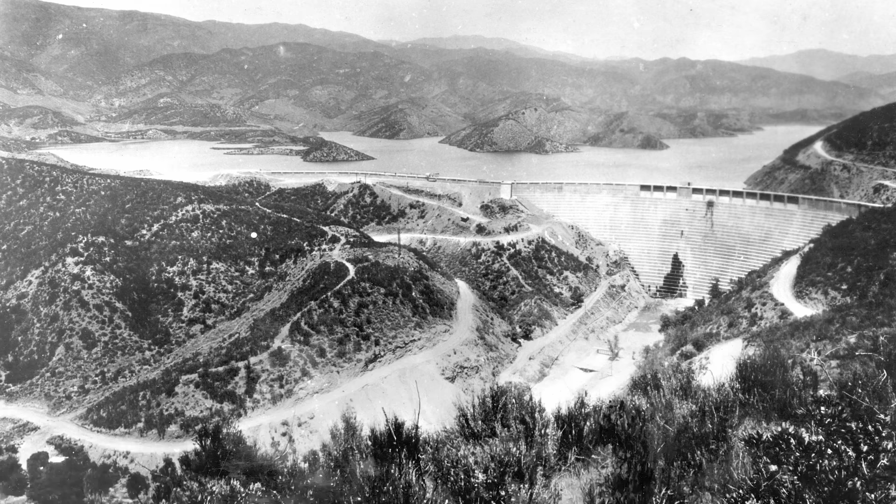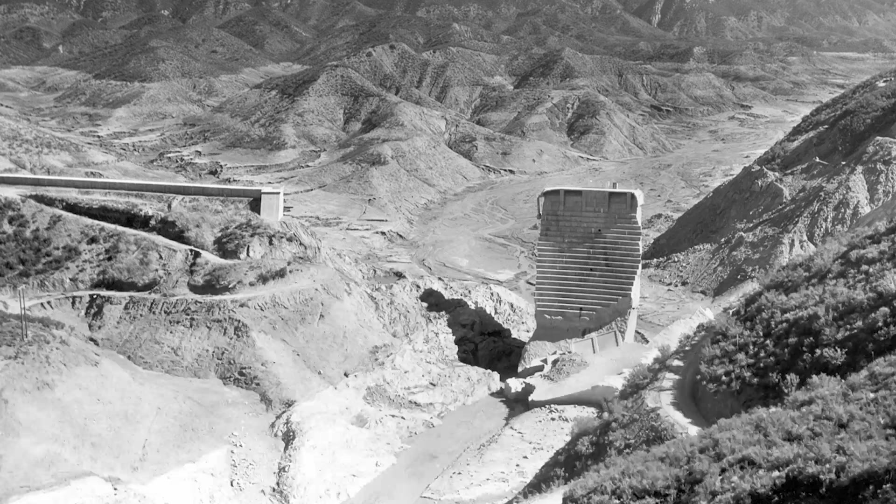The year was 1928, and Californians were still asleep in their beds when a towering concrete dam, once hailed as a triumph of modern engineering, crumbled, unleashing a wall of water that tore throughout the unsuspecting valley. Entire towns were swallowed whole, lives were lost in a heartbeat, and the landscape was forever scarred. Perhaps the most terrifying notion about the event was just how fast everything unfolded.

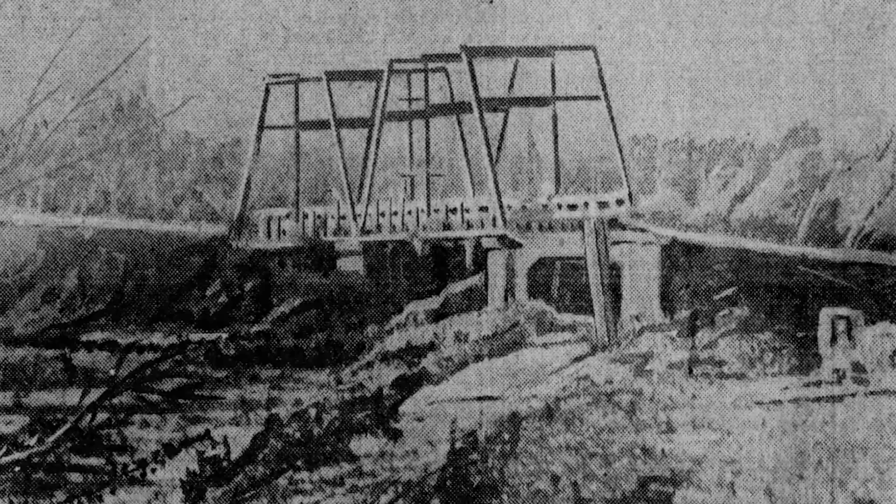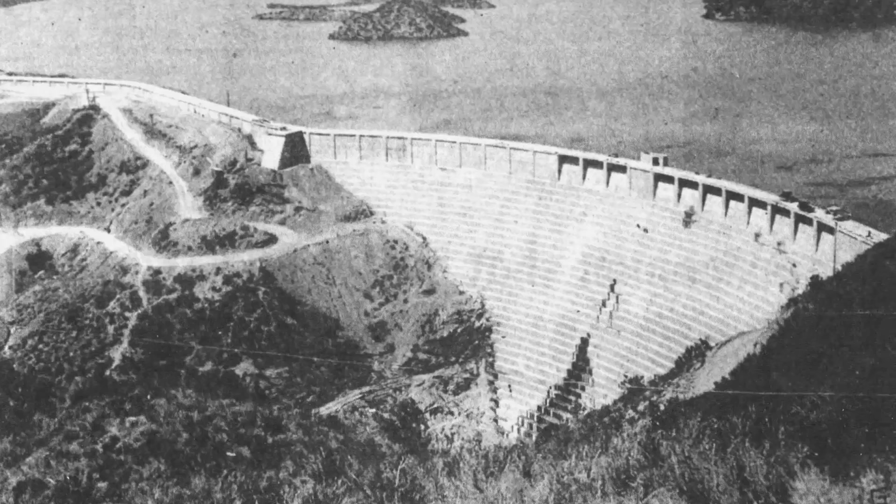The St. Francis Dam collapse remains one of the deadliest engineering failures in American history. But what caused this seemingly invincible dam to fail so catastrophically? Was it a design flaw, a construction error, or a deeper, more unsettling truth? The answer might shock you, so stay tuned to find out, as today we discover the history of the St. Francis Dam collapse.

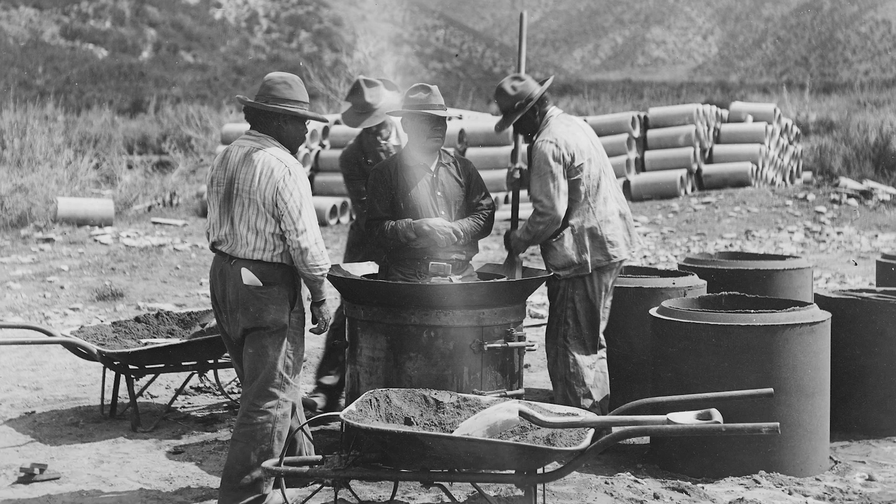The heart of this story is water, a simple necessity that, historically speaking, has always been problematic for California. For millennia, seasonal rains carved their way through the rugged Sierra Pelona Mountains, feeding a small creek that snaked its way towards the Pacific, where ultimately it would dump precious freshwater into the sea. In the area's early history, human life thrived on a natural balance, with scattered settlements drawing their water from this source. But by the early 20th century, a different kind of thirst had gripped California.

The once sleepy town of Los Angeles was transforming into a vibrant metropolis. Its population boomed, fueled by sunshine and the promise of a new life. However, this burgeoning city faced a critical challenge: water. You see, Southern California is naturally arid, and the existing water sources were strained to the limit.

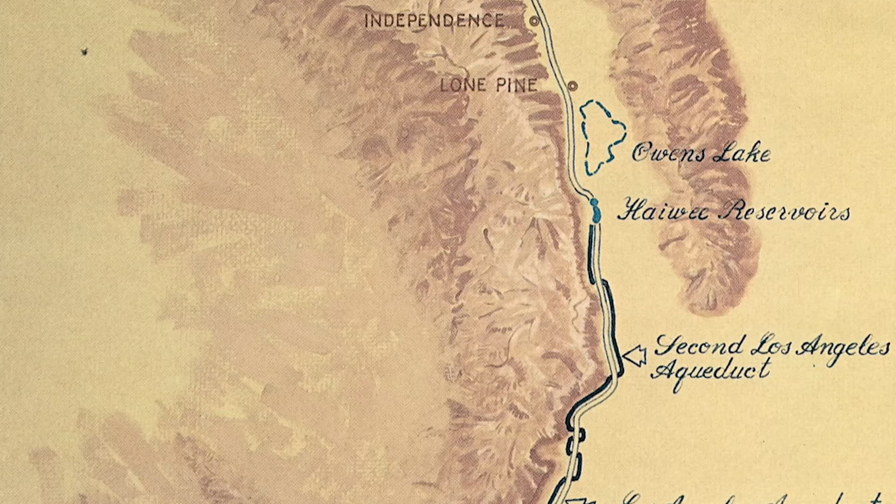Enter William Mulholland, a visionary engineer who embarked on a daring project, the Los Angeles Aqueduct. This colossal feat of engineering would siphon water from the Owens River hundreds of miles away to quench the growing thirst of Los Angeles. But the aqueduct wasn't enough. The city needed a way to regulate the flow of water and create a reserve in case of droughts or emergencies. This is where the story of the St. Francis Dam begins.

The race to quench LA's thirst left little room for deliberation in the design phase of the St. Francis Dam. So Chief Engineer William Mulholland, a self-made water baron known for his bold vision and breakneck pace, opted to adapt the blueprints of a previous dam, the Mulholland Dam. This expediency, however, cast a long shadow. You see, unlike the meticulously surveyed foundation of the Mulholland Dam, the St. Francis Dam site received a cursory examination.

The unforgiving terrain presented a complex geological puzzle. Steep, rocky slopes plunged into the narrow valley. And as if that wasn't bad enough, their composition was a hodgepodge of fractured rock and weak shale. While a thorough survey may have unearthed these underlying weaknesses, the pressure to deliver water quickly trumped any such precautions.

And so many attest that the choice of the location itself stemmed from a blend of practicality and Mulholland's characteristic audacity. The canyon offered a natural choke point where a relatively short dam could create a substantial reservoir. Additionally, its proximity to the LA aqueduct minimized the length of connecting canals, saving both time and money. However, this seemingly ideal location masked hidden dangers. The fractured rock beneath the dam site, unseen and unconsidered, would become a critical factor in the dam's ultimate demise.

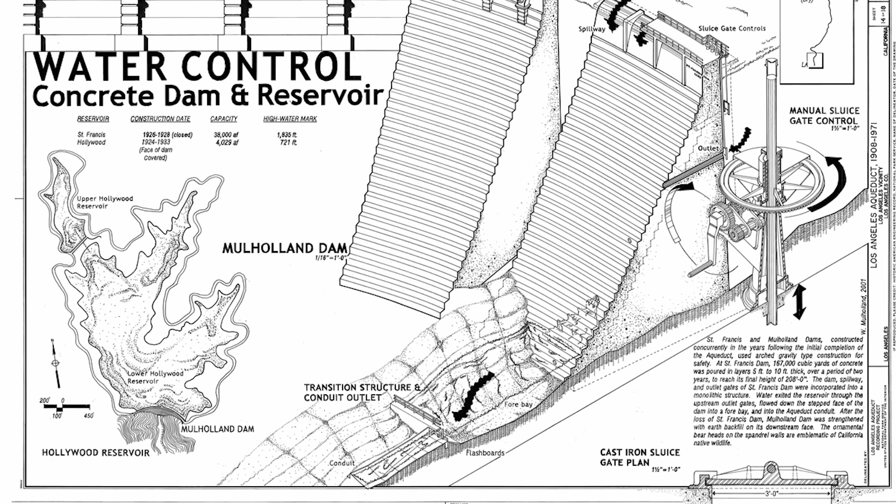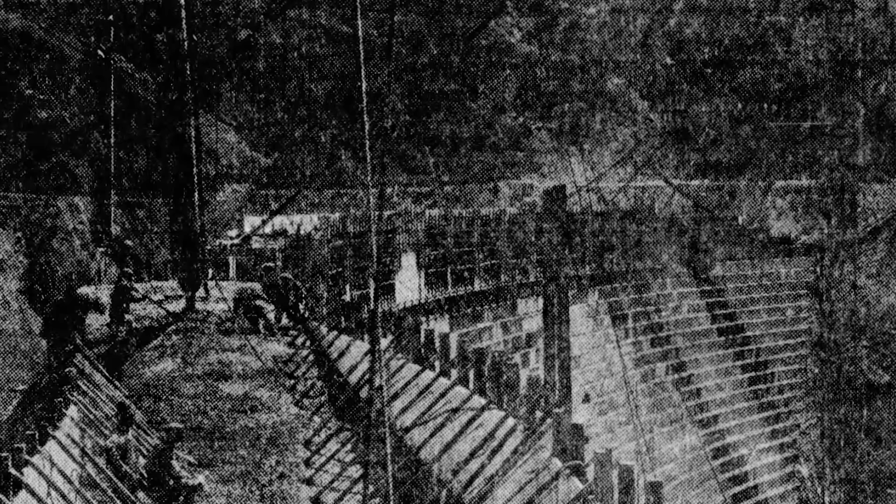The design itself echoed Mulholland's bigger is better philosophy and would tower at a dazzling height of 208 feet. But this size was not just to make impressions. Rather, it was intended to maximize capacity. Yet still, there was a major flaw. You see, this towering ambition wasn't matched proportionally by the dam's base. While a wider base would have provided crucial stability, it would also have required more construction materials and time, both of which were in short supply, resulting in a design that resembled a concrete Goliath perched precariously on a foundation ill-equipped to handle its immense weight.

In this rush to meet an ever-growing demand, the engineers at the LA Department of Water and Power were building not just a dam, but a potential time bomb, nestled within the rugged embrace of the canyon.

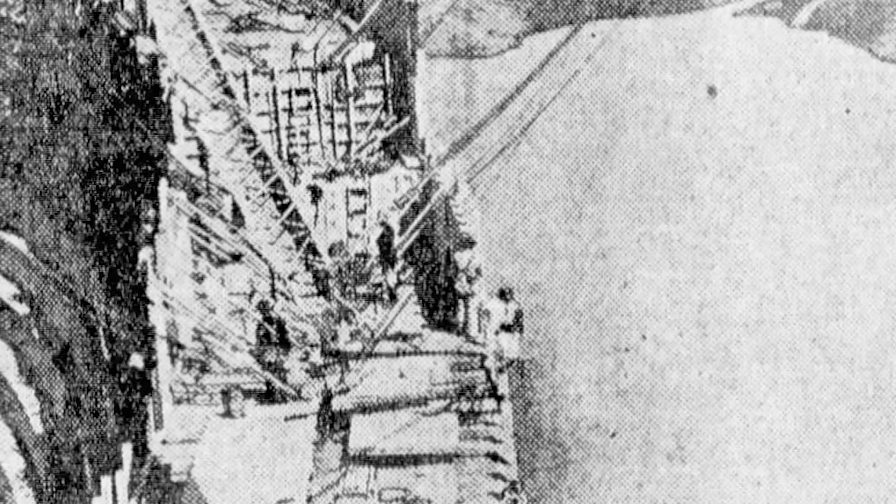In no time, the serene landscape was transformed into a beehive of activity. Workers cleared the land for the soon-to-be submerged reservoir, their focus solely on creating a clean slate for the water. The ground itself underwent quite the makeover. Loose soil and debris were removed so as to not muck up the drinking water, and the remaining earth was compacted to form a solid base for the dam's immense weight.

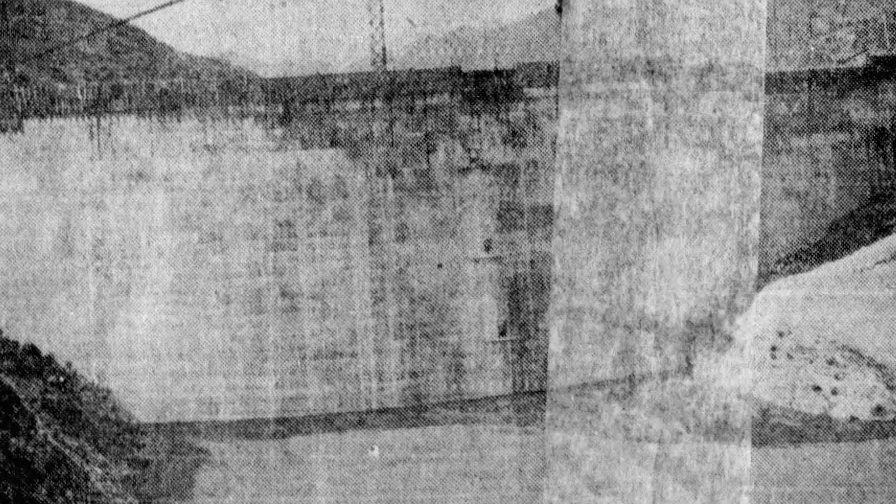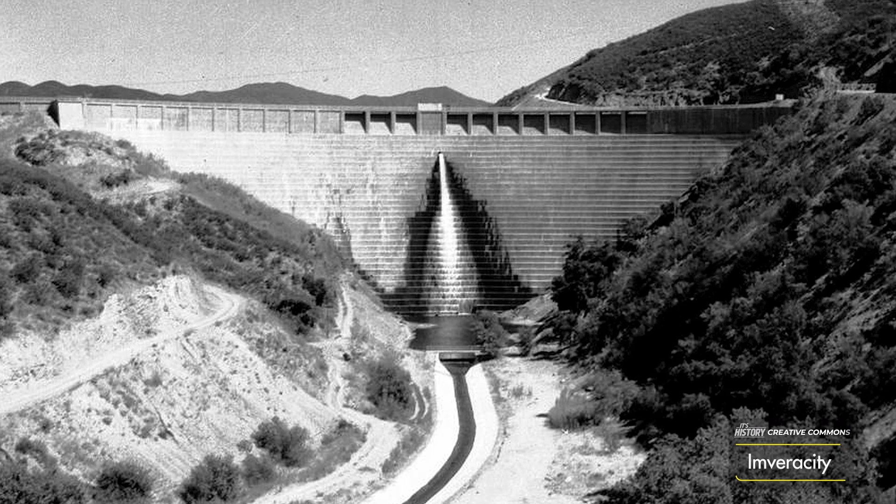Natural caves or other potential escape routes for water were meticulously plugged with concrete or grout. Then, on July the 1st, 1924, the same day Mulholland was to submit his annual report to the Board of Public Service Commissioners, Office Engineer W. Hurlbut informed him that all the preliminary work on the dam had been completed. In his report presented to the board, Mulholland wrote that the capacity of the reservoir would be 32,000 acre-feet.

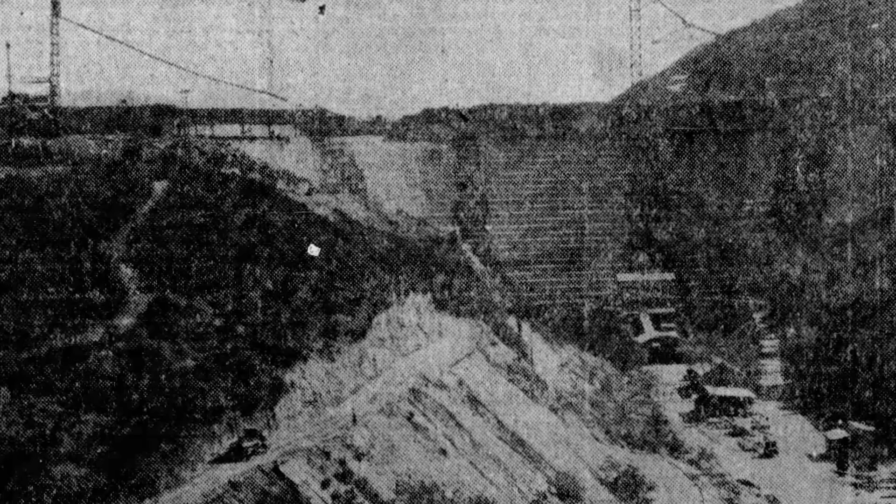The dam itself rose in a series of rapid-fire concrete pours. Towering cranes hoisted buckets of wet material, layer upon layer, building a concrete colossus that dwarfed the surrounding landscape, and it slowly emerged. When completed, on May the 4th, 1926, the stair-step-faced dam rose to a height of 185 feet above the canyon floor. Both faces leading up to the crest were vertical for the final 20 feet.

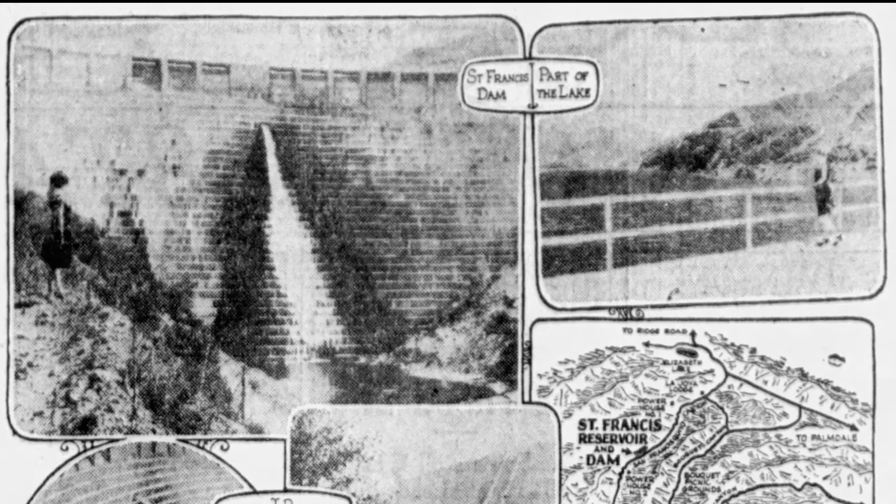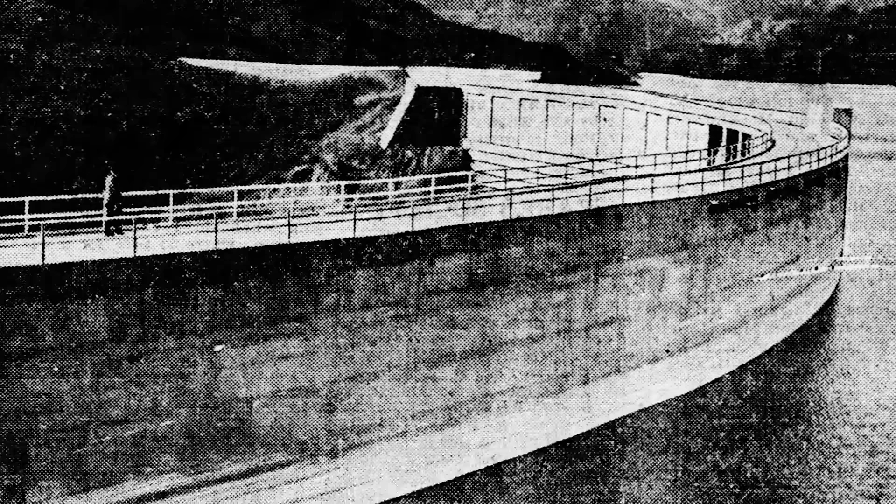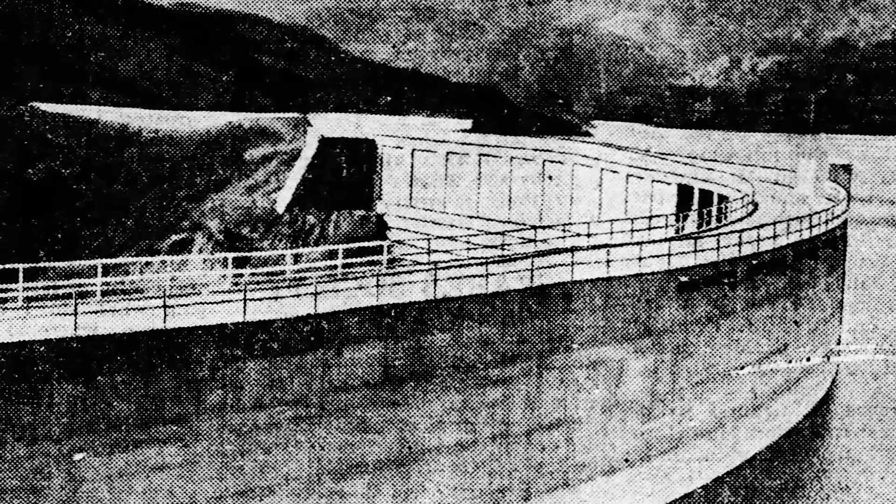On the downstream face, the vertical section was fashioned into 24-foot wide sections. A portion of these made up the spillway, which consisted of 11 panels in total, divided into two groups. Each spillway section had an open area that was 18 inches high and 20 feet wide for the overflows to pass. The dam also had 5 30-inch diameter outlet pipes through the center section, which were controlled by slide gates attached to the upstream face.

And so it was. The scaffolding finally came down, revealing the St. Francis Dam in all its imposing glory. But beneath the surface lurked a disquieting truth, and unknown to everyone, the hasty survey and the design shortcomings like the skimpy base meant that the dam was just a disaster waiting to happen. And the true test, the one that would expose its vulnerabilities, was yet to come: the filling of the reservoir.

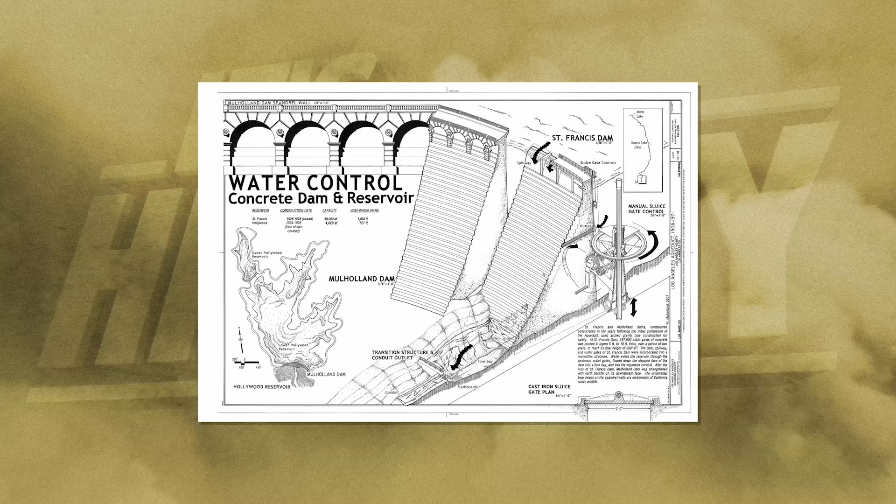Taming the San Francisquito Creek was a calculated move. In March 1926, water began its slow journey towards the newly built dam. A canal diverted the creek's flow, channeling it into the base of the dam. The process was deliberate, a trickle compared to the future torrent that the dam was designed to hold. Several temperature and contraction cracks did appear, and a minor amount of seepage began to flow from under the abutments. However, by the protocol for design, which had been established by the engineering department during the construction of the Mulholland Dam, no contraction joints were incorporated.

The most notable incidences were 2 vertical cracks that ran down through the dam from the top. One was approximately 58 feet west of the outlet gates, and the other about the same distance to the east. Mulholland and his assistant chief engineer and general manager, Harvey Van Norman, inspected the cracks and judged them to be within expectation for a concrete dam of this size.

By the beginning of April, the water level reached the area of the inactive San Francisquito fault line in the western abutment. Crucially, some seepage began almost immediately. Workers were ordered to seal off the leak, but they were not entirely successful, and water continued to permeate throughout the face of the dam. 2-inch pipes were used to collect this seepage and were laid from the fault line down to the home of the dam keeper, which he used for domestic purposes. Water collected in the drainage pipes under the dam to relieve the hydrostatic uplift pressure was carried off in this manner as well. Then, throughout the rest of May, the water level was within just 3 feet of overflowing.

There were no large changes in the amount of seepage that was collected, and month after month, the pipe flowed about 1/3 full. Apparently, this was an insignificant amount for a dam the size of St. Francis. And on this subject, Mulholland said, quote, "Of all the dams I have built and all the dams I have ever seen, it was the driest dam of its size I ever saw." In fact, the seepage data recorded during the 1926 to 1927 period shows that, indeed, the dam was an exceptionally dry structure.

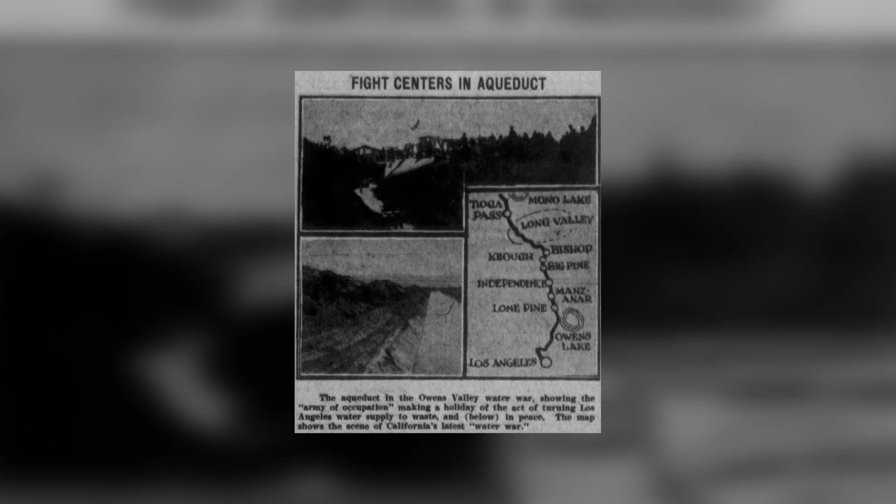Hence, they looked to wetter regions like Northern California and the Owens Valley to quench their needs. This sparked outrage from residents in these areas, who saw their water source as a way of life, threatened by large-scale diversions. Hence, legal battles, political maneuvering, and even acts of sabotage became the weapons in this fight for a vital resource. A second incident took place, destroying another large section of the LA aqueduct, and as the tension escalated, authorities became paranoid about critical structures, such as dams.

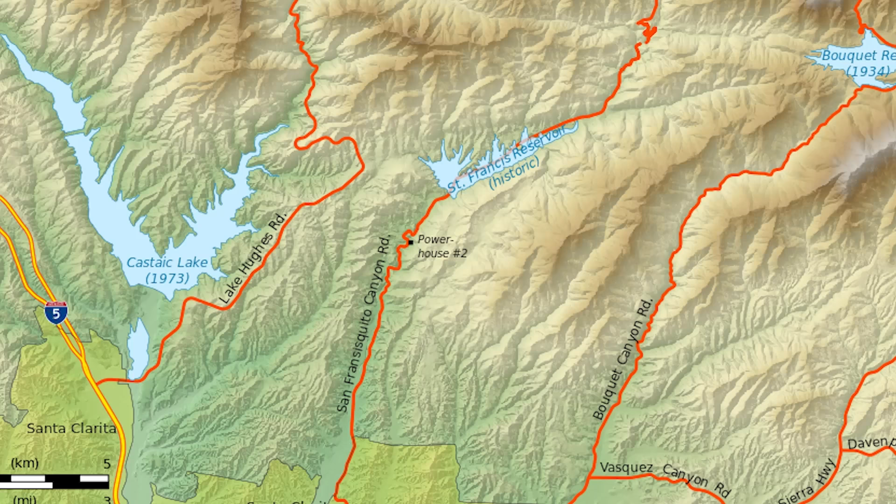In the days that followed, several more sections of the aqueduct were dynamited, causing a complete disruption in the flow, meaning the near-full reservoir behind the St. Francis Dam was the only source of water from the north, and withdrawals began immediately.

During this time, the LA County Sheriff's Department received an anonymous phone call alleging that a carload of men were on their way to dynamite the actual St. Francis Dam. Within minutes, officers were on their way, and personnel of the Bureau of Power and Light, as well as the Bureau of Waterworks and Supply, had been notified as well. Cars carrying dozens of officers from both the LA Police Department and Sheriff's Department rushed to the area.

Although no signs of the threat that brought all of this on materialized, for many days afterwards, the canyon resembled an armed encampment. Furthermore, from the perspective of today, the documented attacks committed during the water wars make the eventual fate of the dam that much more confusing, if not outright conspiratorial. So let's have a look at the official record of how this history unfolded.

The daily record of high water elevation of the St. Francis Dam shows that between May the 27th and June 30th alone, 7,000 to 8,000 acre-feet of water was withdrawn. Through June and July, the Owens Valley fight continued, as did interruptions in the flow from the aqueduct. This in turn caused continuous withdrawals from the reservoir.

However, in early August, opposition to the LA water projects collapsed after the indictment of its leaders for embezzlement. The city subsequently sponsored a series of repair and maintenance programs for the aqueduct facilities that stimulated local employment. From here, the St. Francis Reservoir level rose once again, although not without incident.

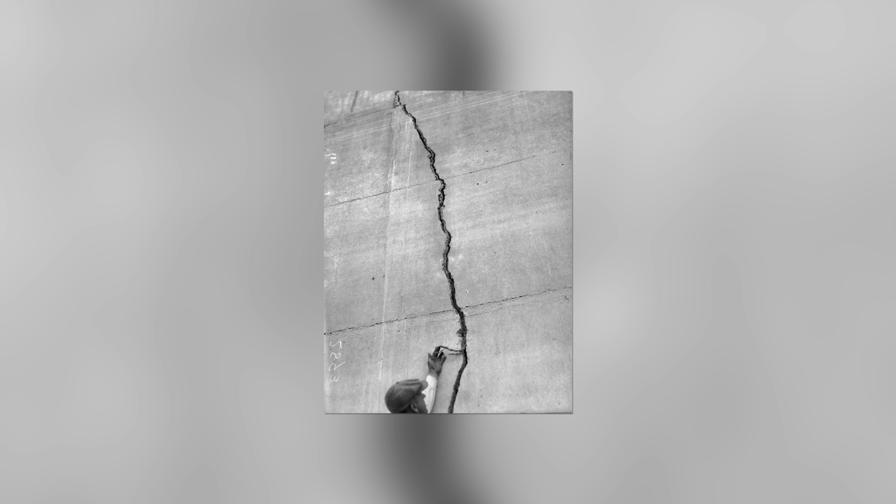At the same time, another fracture appeared in the corresponding position on the eastern portion of the dam, starting at the crest near the spillway. This crack ran downwards at an angle for about 65 feet before ending at the hillside. It too was sealed off in the same manner. Both of these fractures were noted to be wider at their junction with the hillside supports and narrowed as they angled towards the top of the dam.

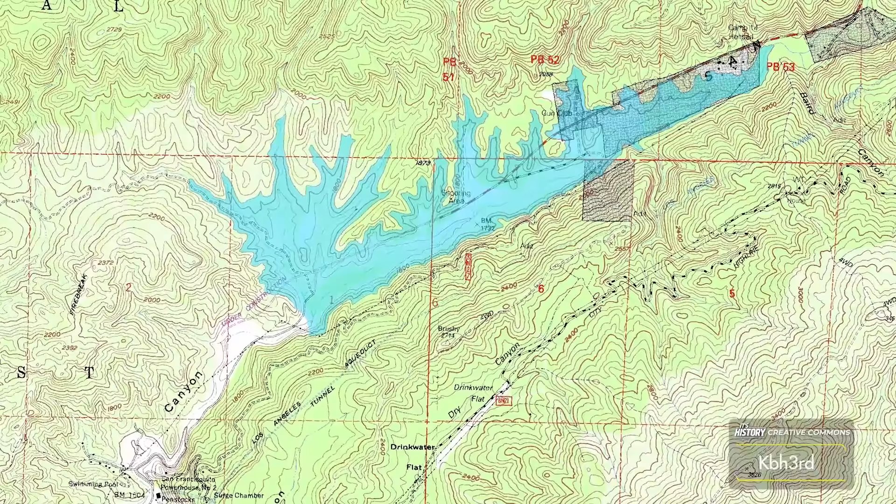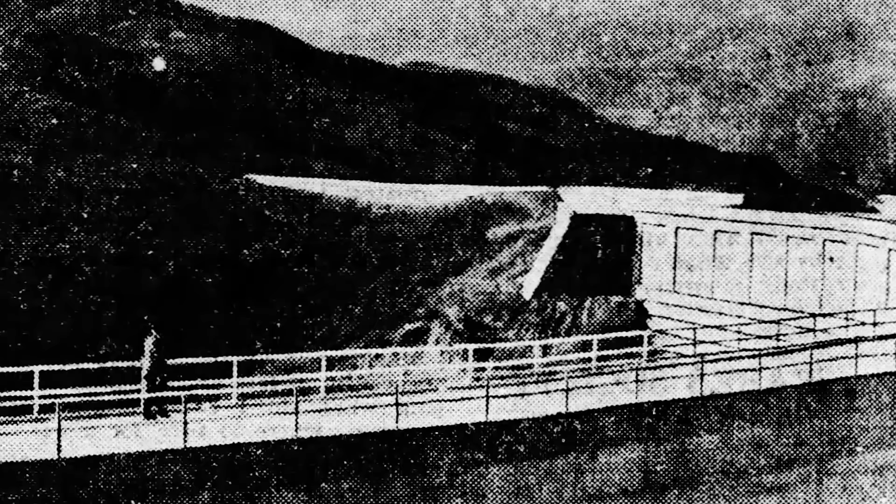The reservoir continued to rise steadily until early February 1928, when finally the water level was brought to within 1 foot of the spillway. During this time, though, several new cracks appeared in the wing dike, and new areas of seepage began to form under both supports. Near the end of February, a notable leak began at the base of the wing dike, approximately 150 feet west of the main dam, discharging about 4.5 gallons per second.

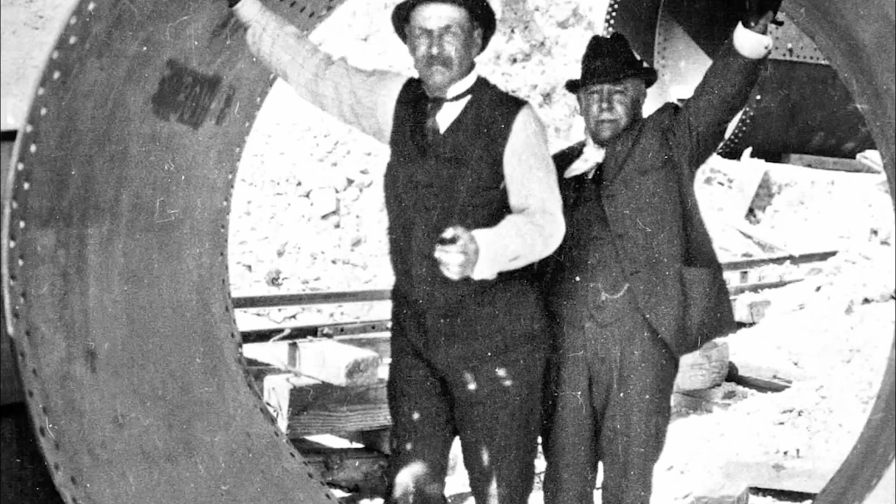The fracture was inspected by Mulholland, who judged it to be just another contraction or temperature crack and left it open to drain. During the first week of March, it was noticed that the leak had approximately doubled, due in part to some erosion taking place, and so Mulholland once again ordered an 8-inch concrete drain pipe to be installed.

The pipe led the water along the dike wall, discharging it at the west abutment, giving the hillside a very saturated appearance. And the water flowing down the steps of the dam, where it bordered the hill, caused alarm among the canyon residents and others traveling the road about 700 feet to the east, as at this distance it appeared that the water was coming from the supports directly.

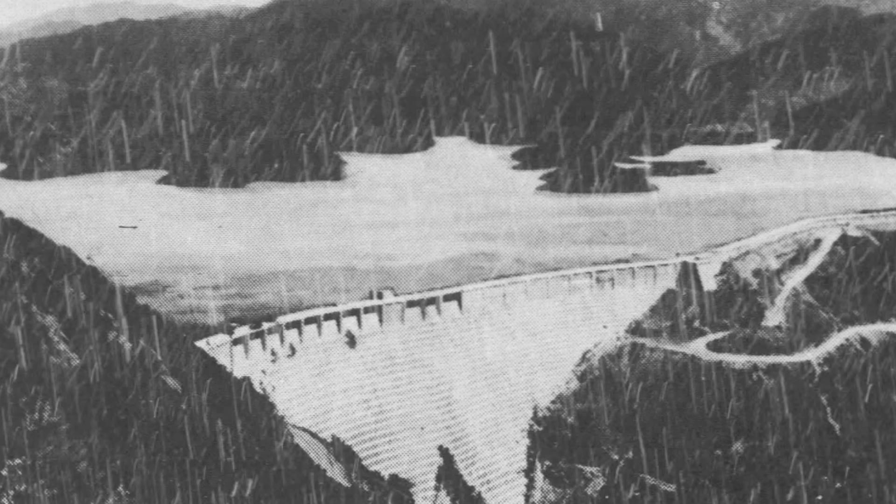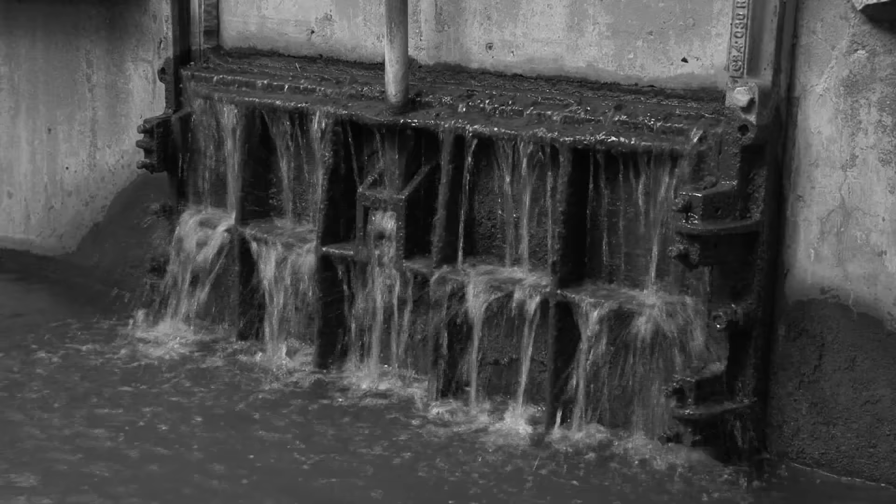On March the 7th, 1928, the reservoir was 3 inches below the spillway crest, and Mulholland ordered that no more water be turned into the St. Francis Dam. 5 days later, while a maintenance worker was conducting his morning rounds, new leaks were discovered, this time on the west end of the structure.

Concerned not only because other leaks had appeared in the same area in the past, but more so due to the muddy color of the runoff he observed. This could have indicated that water was eroding the actual foundation of the dam, and hence he immediately alerted Mulholland.

After arriving, he found the source by following the runoff, determining that the muddy appearance of the water was not from the leak itself, but because it came from where the water contacted loose soil from a newly cut access road. This new leak was discharging 15 to 22 gallons per second. Mulholland's concern was heightened not only by the leak's location, but by the inconsistent volume of discharge.

According to their testimony, on 2 occasions they watched an acceleration or surging of the flow, noting the somewhat bizarre irregularity in their documents. Mulholland felt that some corrective measures were needed, though they were not urgent. They could be done at some time in the future.

For the next 2 hours, Mulholland and his crew inspected the dam and various leaks and seepages, finding nothing out of the ordinary or concerning for such a large dam. With Mulholland convinced that the new leaks were not dangerous and that the dam was safe, they returned to Los Angeles.

So in summary, filling this reservoir took nearly 2 years, and in that time, it was threatened by the California water wars, which had credible threats of infrastructure sabotage. Yet at the same time, the structure was springing leaks left and right, one way or another, leaving those in the valley in a very precarious situation.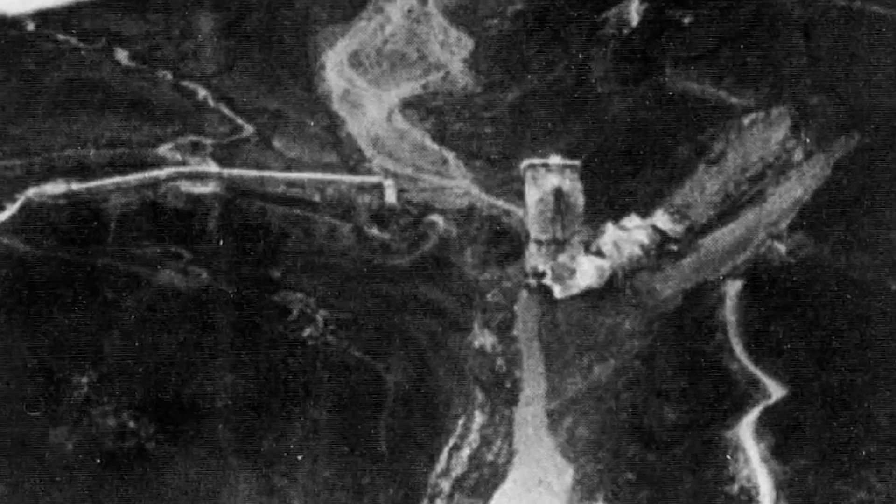Hopewell stopped, got off his motorcycle, and smoked a cigarette while checking the hillsides. The rumbling had begun to fade, and he assumed that the sound was a landslide, a phenomenon that was quite common in the area. From there, he finished his cigarette, got back on his motorcycle, and just left. To the best of recorded history, Hopewell was the last person to see the St. Francis Dam intact and survive.

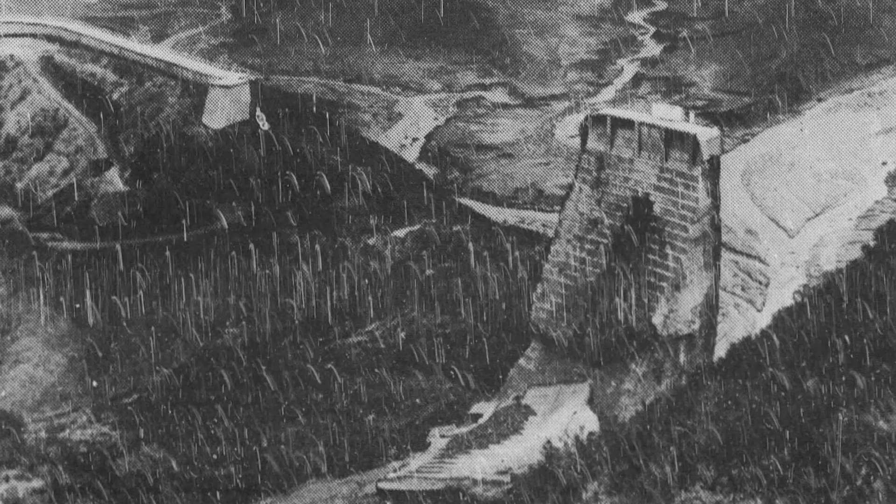At both the Bureau of Power and Light's receiving station in LA and the Bureau of Waterworks and Supply at Powerhouse Number 1, there was a sharp voltage drop at 11:57 p.m. Simultaneously, a transformer at Southern California Edison's substation exploded, a situation investigators later determined was caused by wires up the western hillside of the San Francisquito Canyon, about 90 feet above the dam's western abutment, shorting.

Given the known height of the flood wave and the fact that within just 70 minutes or less after the collapse, the reservoir was virtually empty, this failure must have been sudden and complete. Seconds after it began, little of the dam remained standing, other than the center section and wing wall. The main dam, from the west of the center section to the wing wall abutment atop the hillside, broke into several large pieces and numerous smaller pieces.

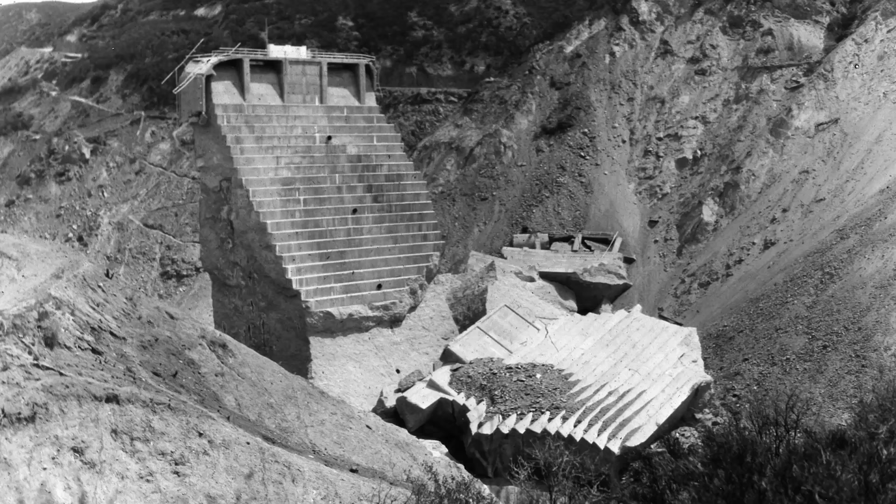All of these were washed downstream as 12.4 billion gallons of water began surging down the canyon. The largest whole piece of structure, weighing approximately 10,000 tons, was found about 3/4 of a mile below the dam site. Somewhat similarly, the dam portion to the east of the center section had also broken into several large and smaller pieces.

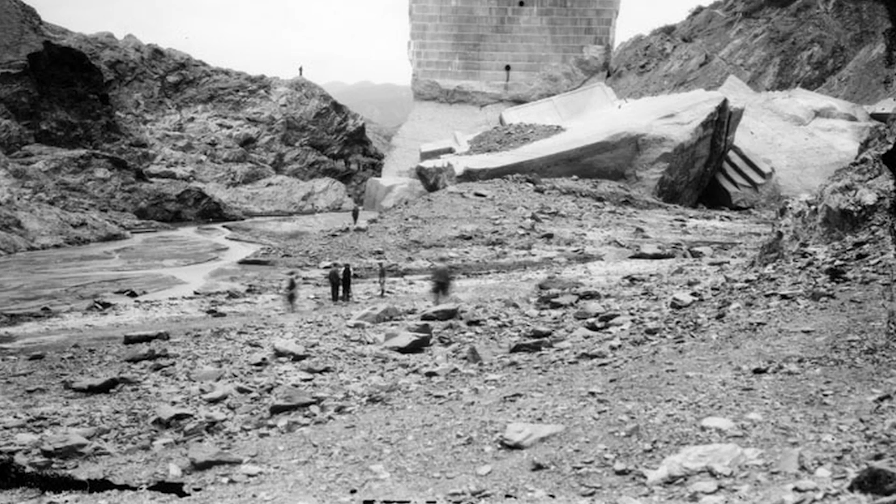Unlike the western side, most of these came to rest near the base of the standing section. The largest fragments fell across the lower portion of the standing structure, coming to rest partially on its downstream face. Initially, the two remaining sections of the dam remained upright. As the reservoir lowered, water undercut the already undermined eastern portion, which twisted and fell backwards towards the eastern hillside, breaking into three sections.

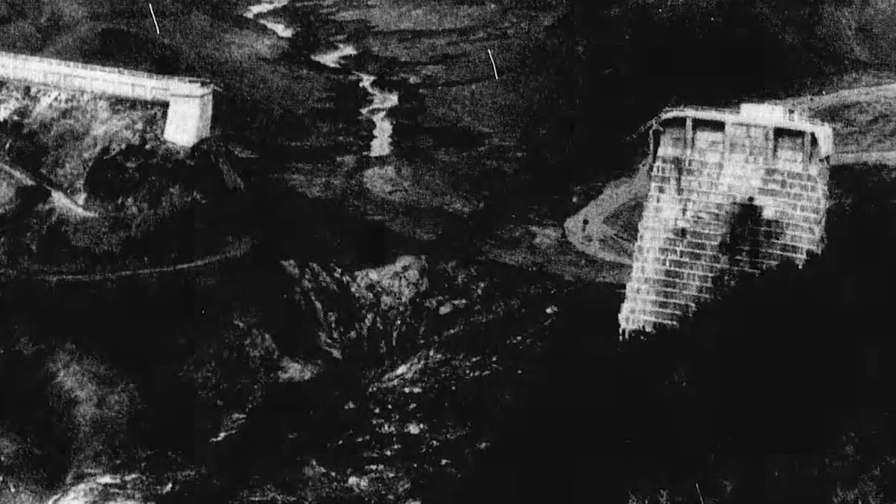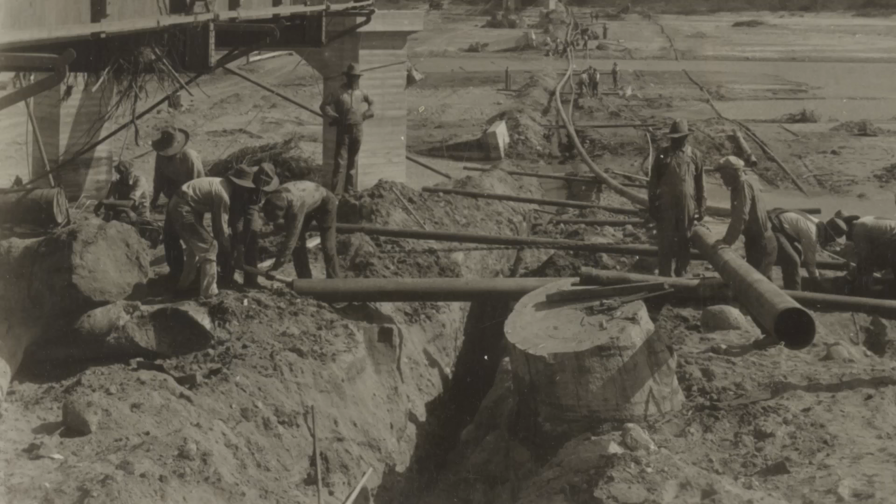A dam keeper and his family were most likely among the first casualties caused in the initial 125-foot high wave, which swept over their cottage about 1/4 mile downstream from the dam. The body of the woman who lived with the family was found fully clothed and wedged between two blocks of concrete near the base of the dam. This led to the suggestion that she and the keeper may have been inspecting the structure immediately before its failure. The remains of other family members were washed away, never to be found again.

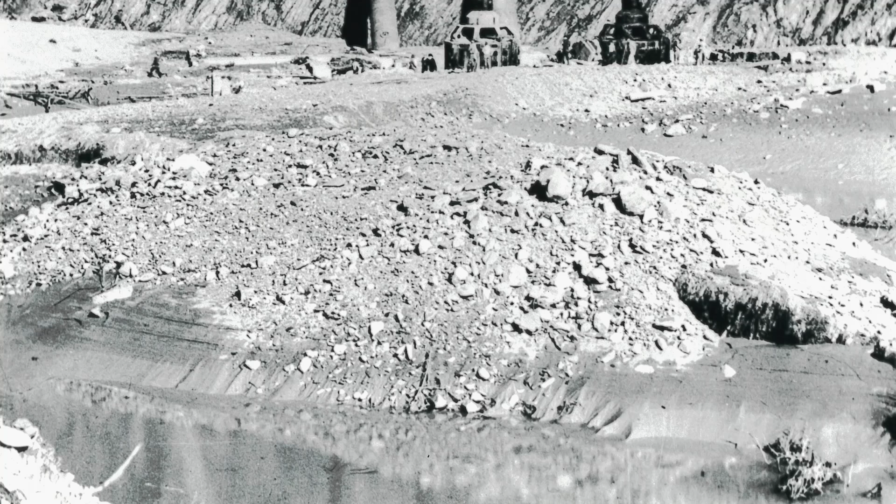5 minutes after the collapse, the then 120-foot high flood wave had traveled 1.5 miles at an average speed of 18 miles per hour, destroying powerhouse number 2 and taking the lives of 64 out of the 67 workmen and their families who lived nearby. This cut power to much of Los Angeles and the surrounding valley. Power was quickly restored via tie-ins with SCE, but as the floodwater entered the Santa Clara riverbed, it overflowed the river's banks, causing a whole new array of problems.

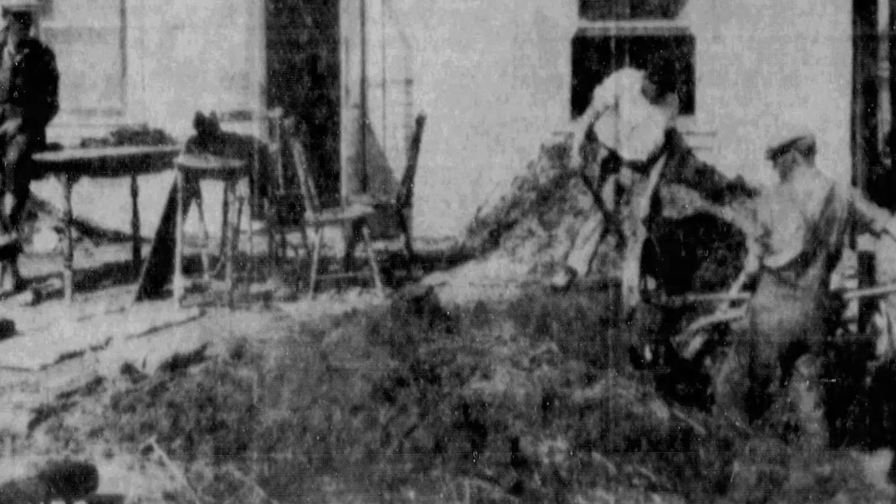At about 12:48 a.m., SCE's two main lines into the city were destroyed by the flooding, redarkening the areas that had earlier lost power and spreading the outage to other areas served by this company. Near 1 a.m., the mass of water, then 55 feet high, followed the riverbed west, demolishing more substations along the way, cutting power to the entire Santa Clara River Valley, as well as parts of Ventura.

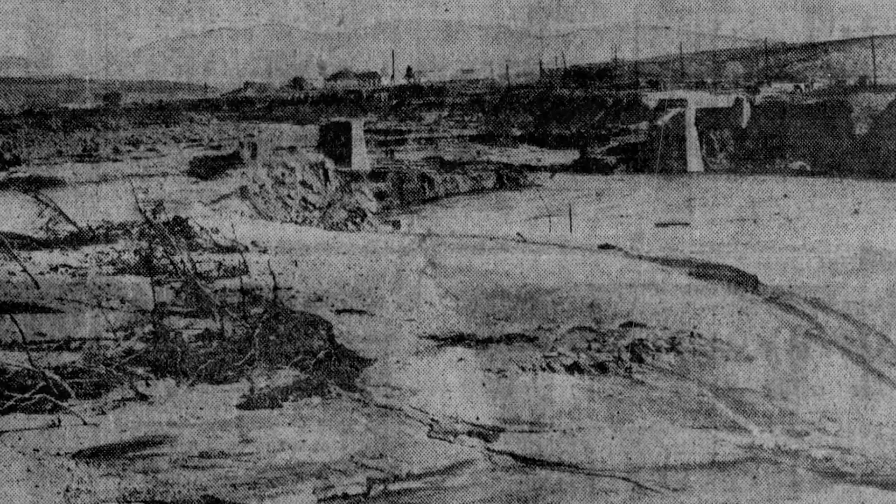At least 4 miles of the state's main north-south highway was underwater, and the town of Castaic Junction was being washed away. From there, the flood entered Santa Clara River Valley at 12 miles per hour, approximately 5 miles downstream, near the Ventura-Los Angeles County line, demolishing a temporary work camp where a 150-man crew were residing on the flats of the river. In the confusion, personnel were unable to issue a warning, and 84 workers perished.

Then, shortly before 1:30 a.m., the Santa Clara River Valley telephone operator learned from the Pacific Long Distance Telephone Company that the St. Francis Dam had failed. She called a motorcycle officer with the State Motor Division, who began contacting homes in danger. The officer went door to door warning residents about the imminent flood. At the same time, a deputy sheriff drove up the valley towards the flood with his siren blaring until he had to stop at Fillmore.

The flood heavily damaged the towns of Fillmore, Bardsdale, and Santa Paula before ultimately emptying both victims and debris into the Pacific Ocean 54 miles downstream, south of Ventura, at what is now the West Montalvo oil field. This must have been a very eerie sight at 5:30 a.m. as the sun was rising. By this point, the wave was almost 2 miles wide and still traveling at 6 miles per hour.

Newspapers across the country carried accounts of the disaster. The front page of the LA Times ran 4 stories, including aerial photos of the collapsed dam and the ruins of Santa Paula. In a statement, Mulholland said, quote, "I would not venture at this time to express a positive opinion as to the cause of the St. Francis Dam disaster. I arrived at the scene of the break around 2:30 a.m. this morning. We saw at once that the dam was completely out and that the torrential flood of water from the reservoir had left an appalling record of death and destruction in the valley below."

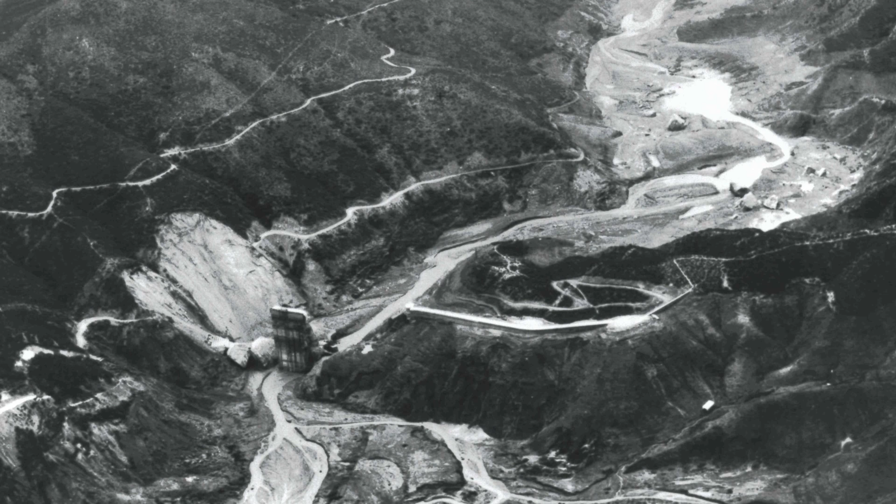Mulholland stated that it appeared that there had been a major movement in the hills forming the western buttress of the dam, adding that 3 eminent geologists had been hired by the Board of Water and Power Commissioners to determine if this was the cause. In the blink of an eye, lives were lost. Mulholland's reputation was forever tarnished, and the public demanded answers.

Following the St. Francis Dam disaster in 1928, numerous investigations were launched to determine the cause of the collapse. Several commissions were formed, including those by the governor, Los Angeles City Council, and county coroner. Most agreed on the dam's faulty foundation as the primary culprit. You see, the weak, fractured rock on the west side led to instability.

The east side was also less than ideal due to an old landslide, causing a water pressure uplift to impact the already critical weakness. The most common theory also suggests a leak developed on the west side, followed by a domino effect. The weakened foundation crumbled, the dam's weight caused further collapse, and the water pressure did the rest. However, Willis and Grunsky, a team involved in the collapse investigation, proposed a different scenario.

They believed the water seeped into the eastern side, lubricating the rock and causing it to push against the dam. Additionally, the west side's rock swelled when wet, squeezing the dam like a vice. They asserted it was this vice effect, along with uplift, that led to the dam's failure.

No one will ever know for sure, and there were also intense debates on the time frame leading up to the collapse. Some investigators believed increased leakage occurred beforehand, while others disagreed. There were also questions surrounding the structure having been a target of the water wars in years prior, though these have been widely dismissed as conspiratorial.

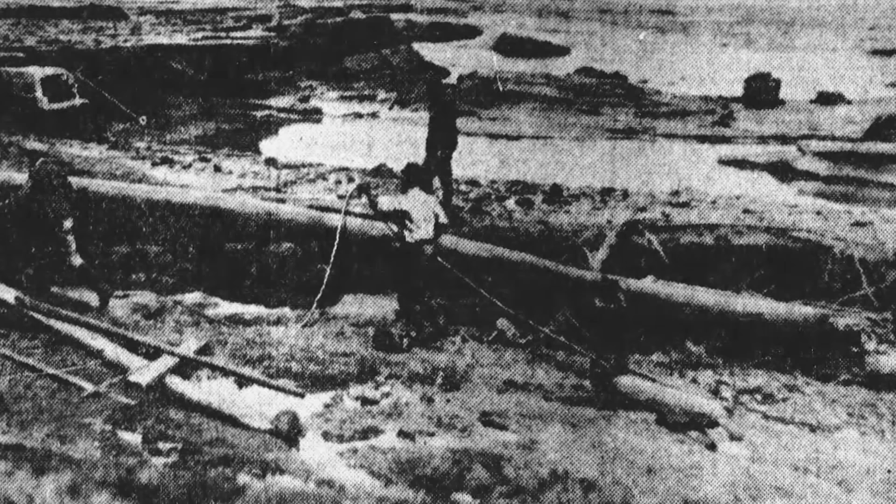Many victims were swept out to sea when the flood reached the Pacific Ocean and were never recovered, while others were washed ashore, some as far south as the Mexican border. The remains of one victim were found deep underground near Newhall in 1992. The other bodies, believed to be victims of the disaster, were found in the late 1970s, with the last reported victim discovered in 1994. So the death toll is currently estimated to be at least 431.

Initially, Mulholland seemed to struggle to come to terms with the situation, stating, quote, "This inquest is a very painful thing for me to have to attend, but it is the occasion of it that's painful. The ones I envy about this thing are the ones who are dead." Then, in a subsequent testimony, Mulholland spoke with honor in ways unthinkable for the elite class of our modern day. He added, quote, "Whether it is good or bad, don't blame anyone else. You just fasten it on me. If there was an error in human judgment, I was the human. I won't try to fasten it on anyone else."

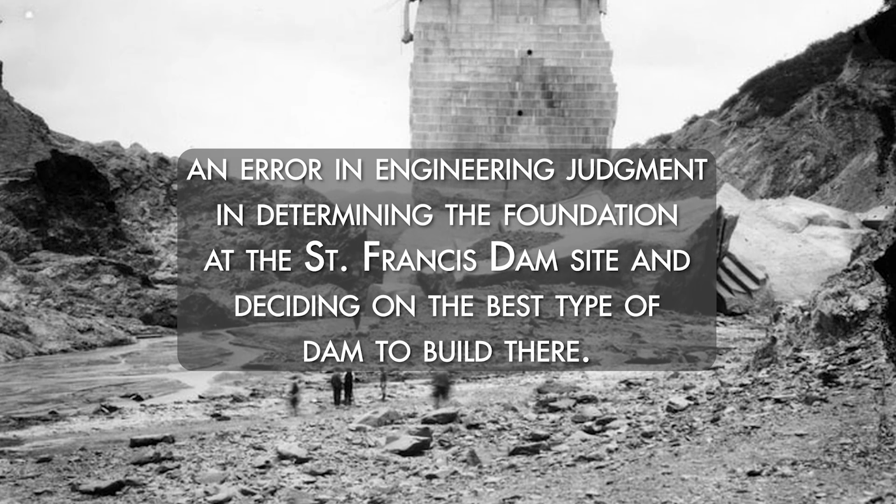Ultimately, the coroner's inquest jury determined that one of the causative factors for the disaster lay in what they termed, quote, "an error in engineering judgment in determining the foundation at the St. Francis Dam site and deciding on the best type of dam to build there." And that, quote, "the responsibility for the error in engineering judgment rests upon the Bureau of Waterworks and Supply, and the chief engineer, thereof."

They cleared Mulholland, as well as others of the Bureau of Waterworks and Supply, of any criminal culpability, since according to the jury, neither he nor anyone else at the time could have known of the instability of the rock formations on which the dam was built. The hearings also recommended that, quote, "the construction and operation of a great dam should never be left to the sole judgment of one man, no matter how eminent."

Mulholland retired in disgrace from the Bureau of Waterworks and Supply on December the 1st, 1928. His assistant, Harvey Van Norman, succeeded him as chief engineer and general manager. In the end, Mulholland was retired as chief consulting engineer with an office and received a salary of $500 per month. In later years, he retreated into a life of semi-isolation, passing away in 1935 at the age of 79. Laid to rest in the Forest Lawn Memorial Park in Glendale, California.